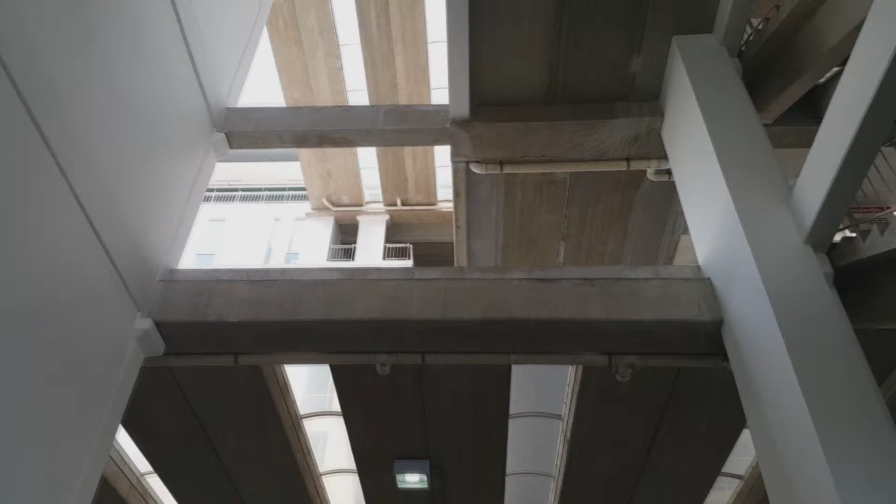For our case study, we chose our Taylor's University as it was assembled using IBS components such as the hollow floor slab. That is, no need to use reinforcement, but only the use of tendon is required. Precast beams and columns and staircases are used. The components have been manufactured off-site and transported to Taylor's University to assemble. The only task that the workers had to do was to assemble the components to make the structure efficiently.

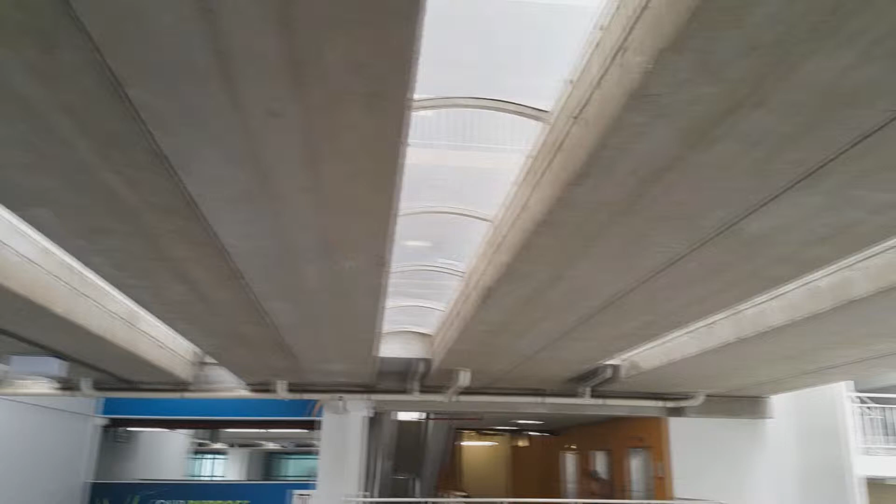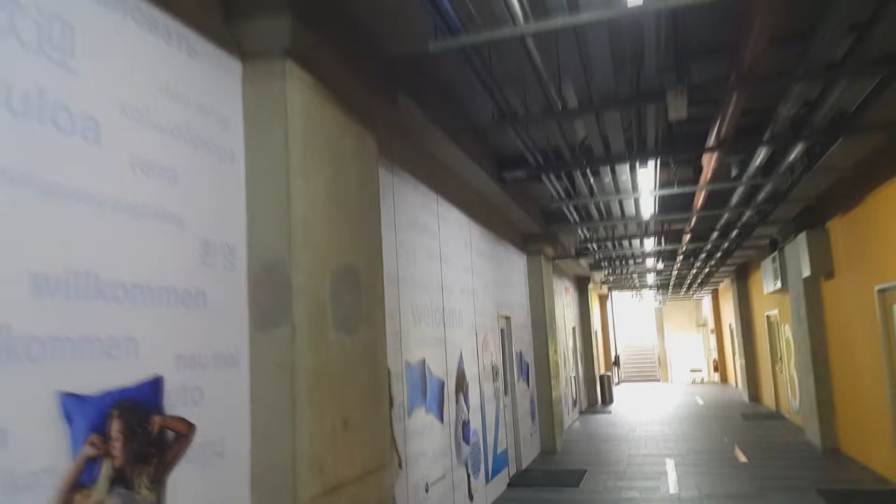This system has reduced construction wastage, it speeds up the construction time, no need for skilled workers, and has improved the construction quality and productivity. This system has lowered the total construction costs in terms of labor, materials, and wastage. The engineers have designed this building to be anti-earthquake, and the life expectancy is up to 100 years by using these precast components.

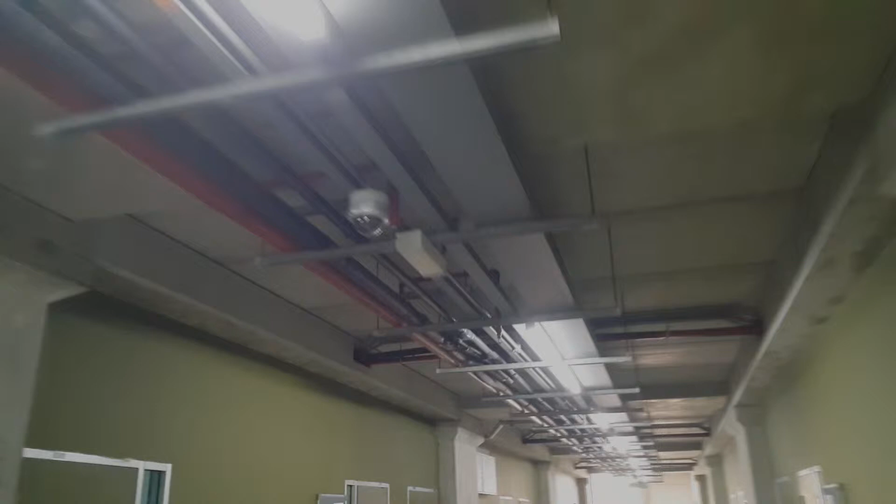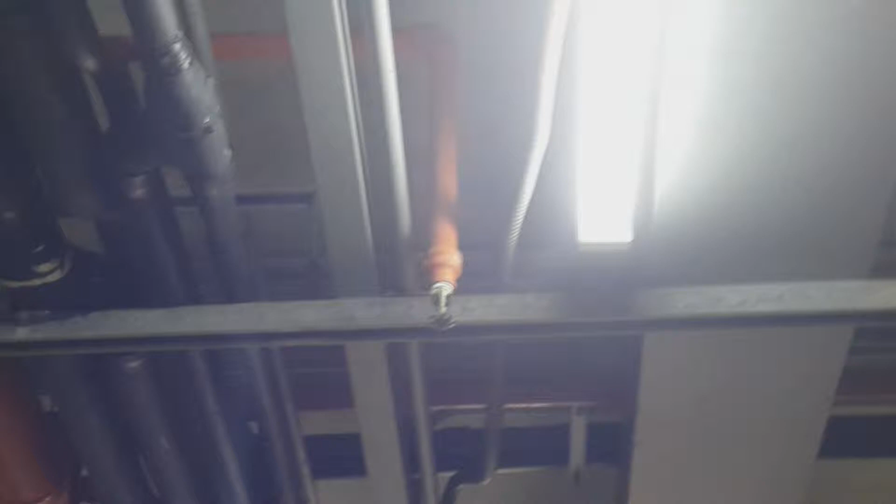Even by using precast components, the services required in this building have been successfully installed in the corridor ceiling, such as electrical wirings, water pipes, air conditioning pipes, and fire protection systems like sprinklers, which are all fixed to the ceiling. Even in the classroom, 3/4 of the space has been used for ceiling purposes to hide the services and add aesthetic value to the room.

The Malaysian government has been encouraging the industrialization of the Malaysian construction industry with different techniques and construction. According to the CIDB IBS survey, less than 1/3 of the completed projects in Malaysia have utilized the IBS method.

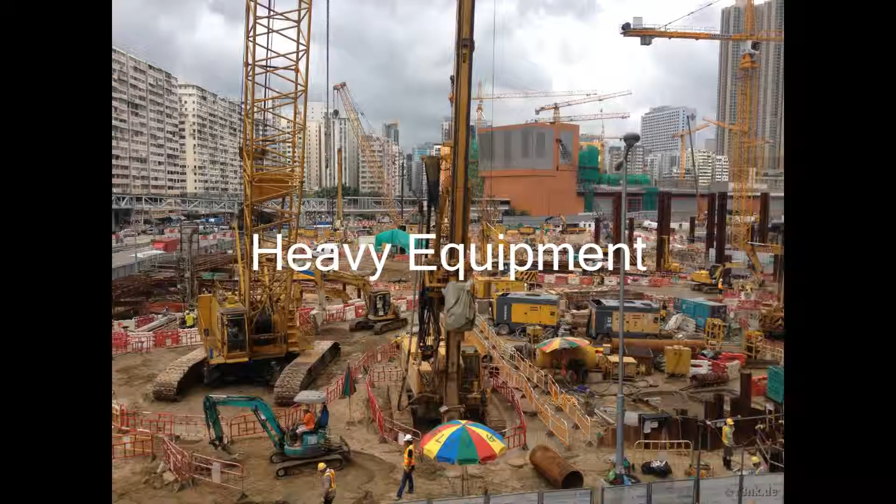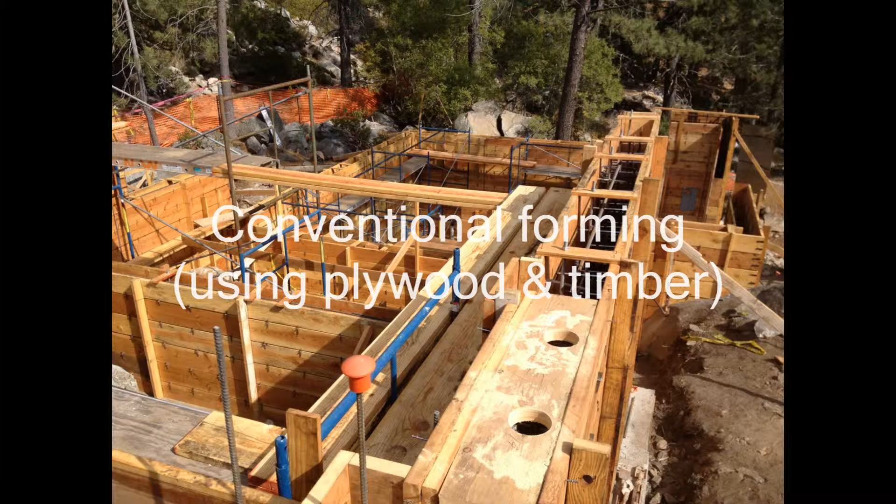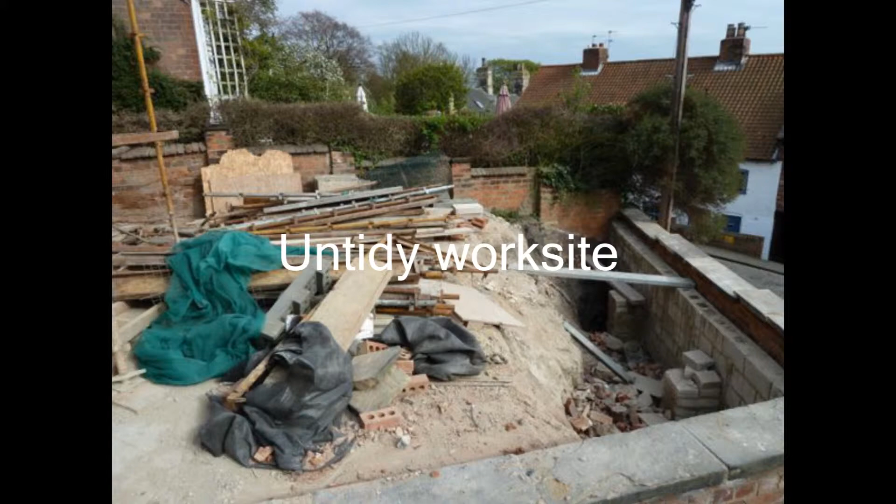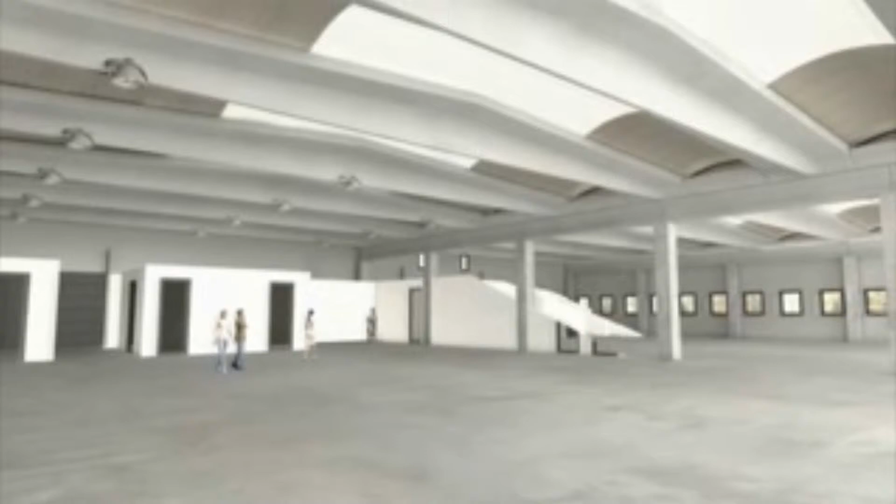This is the process of precast concrete. The process starts with engineering. Every product is engineered using the latest tools, and detailed drawings are created using the 3D computer-aided design process. Once the design drawings are approved, they are sent to the factory floor and used to monitor the production. Now it's time to assemble the rebar cage.

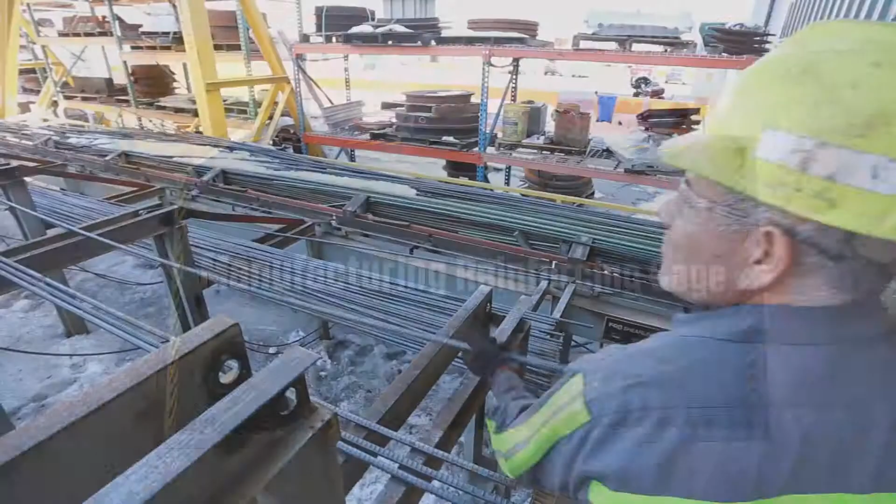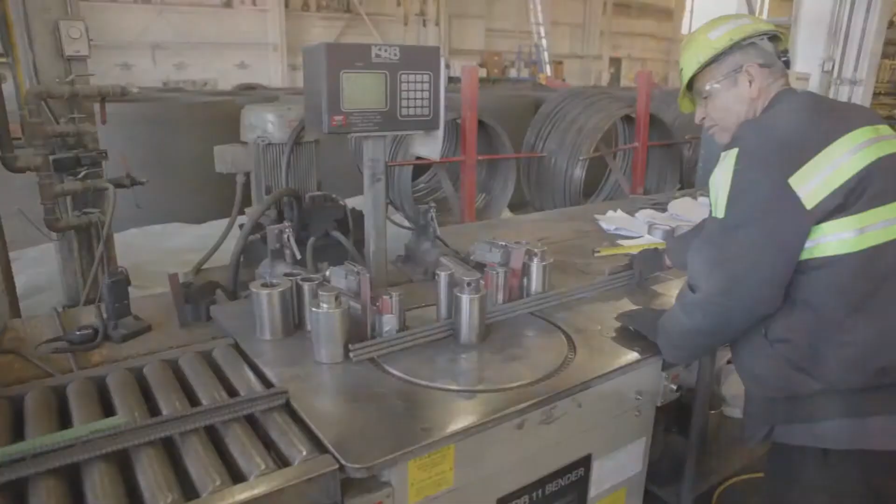The first step of this process is cutting and bending of the steel reinforcement. The correct rebar is selected and taken down off the storage rack. It is then cut and bent to the exact dimensions needed to fit the design requirements. Next, the bars are assembled and tied together to form the reinforcement cage. Rebar wheelchairs are used to help position the cage within the form and ensure proper clearance of the reinforcing.

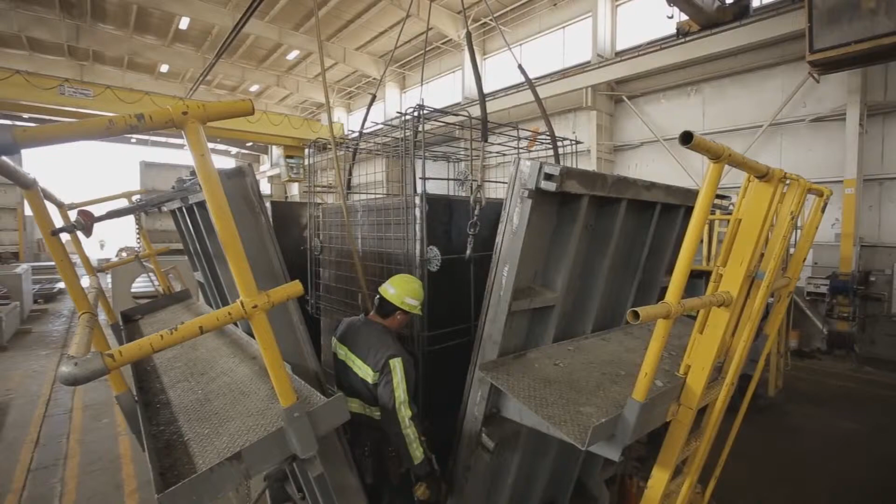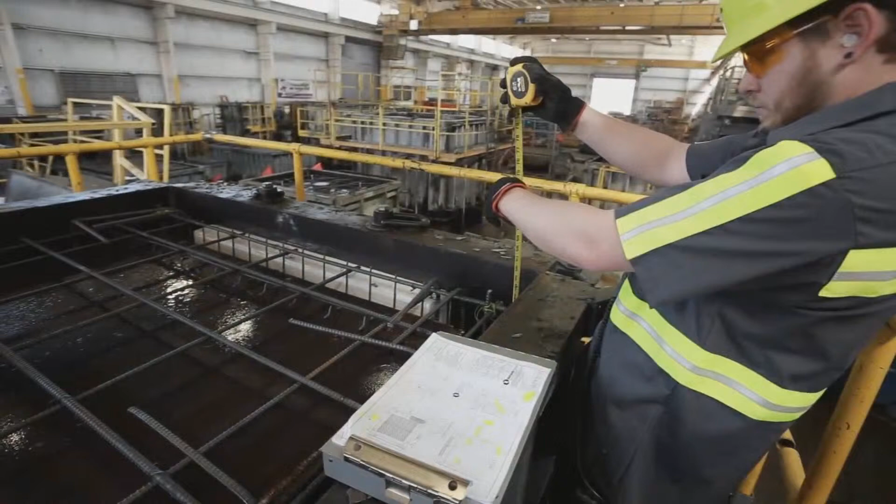Once the cage assembly is complete, preparation and cleaning of the form will begin. A form release is applied to each surface to ensure the final product can be easily lifted from the form. When the form is ready, the overhead crane will pick and place the cage onto the core of the form. Once the setup is complete, a certified quality control technician will conduct a pre-pour inspection. After satisfactory completion of this inspection, the workers will start the concrete placement process.

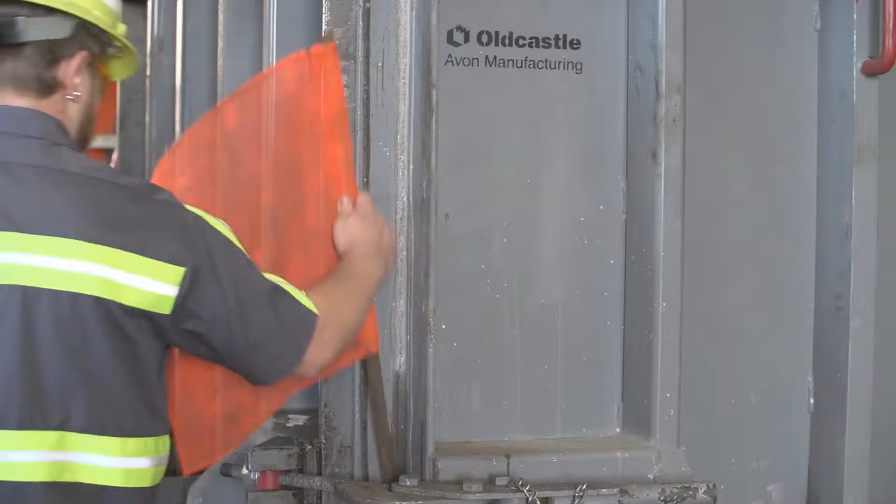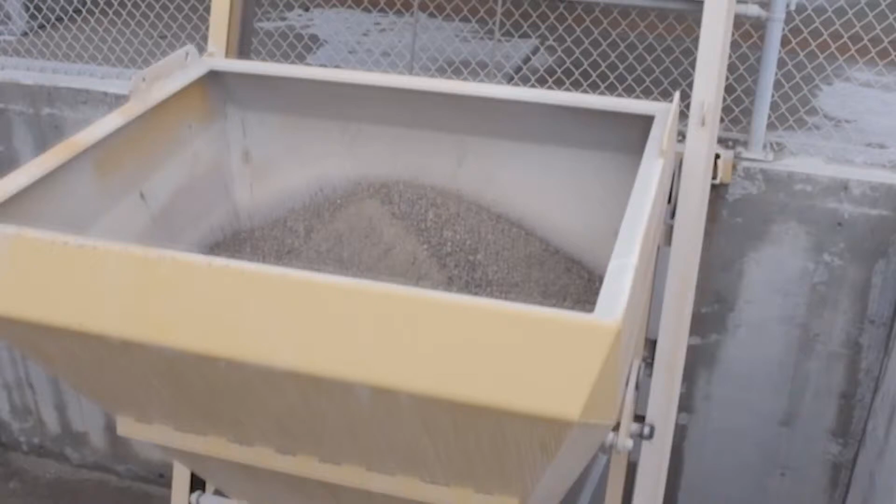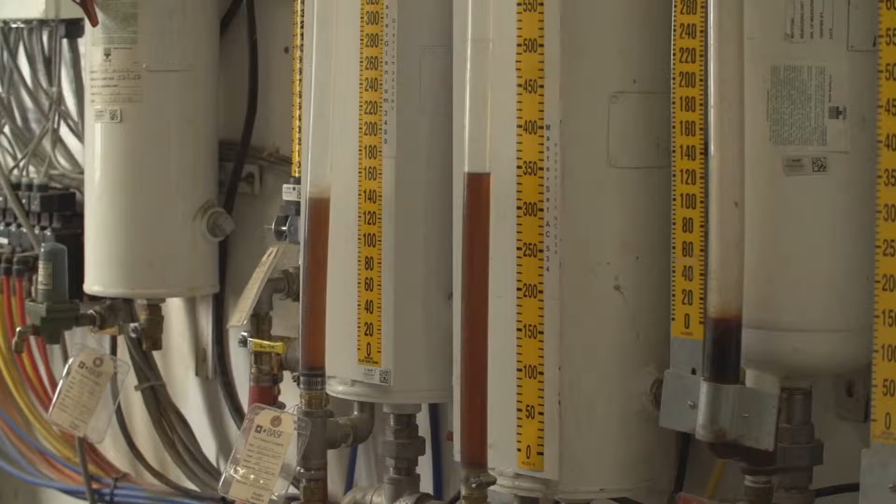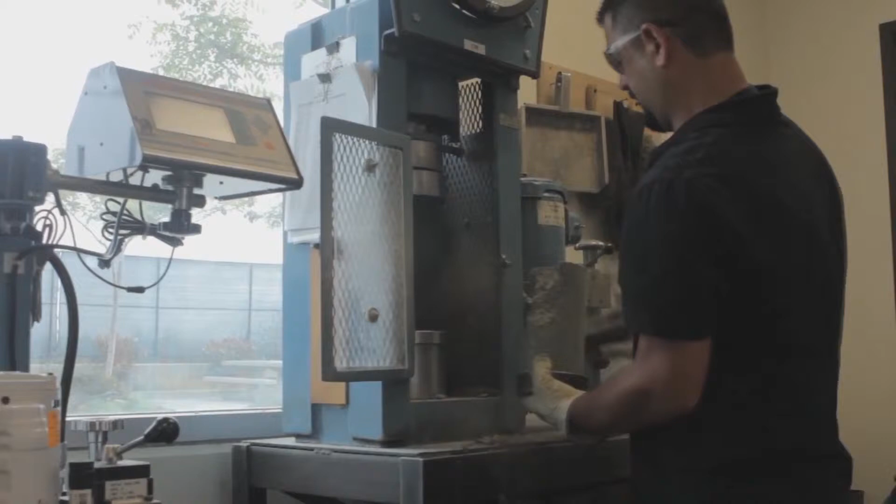The raw materials used for the concrete are cement, coarse aggregate, sand, and chemical admixtures. They are carefully selected and mixed according to the specific requirements. Normally, every precast concrete factory has a concrete laboratory used to conduct routine raw material testing and control exact quantities for each batch. Once the materials are properly mixed, the self-consolidating concrete will undergo a variety of tests to ensure it is of required quality.

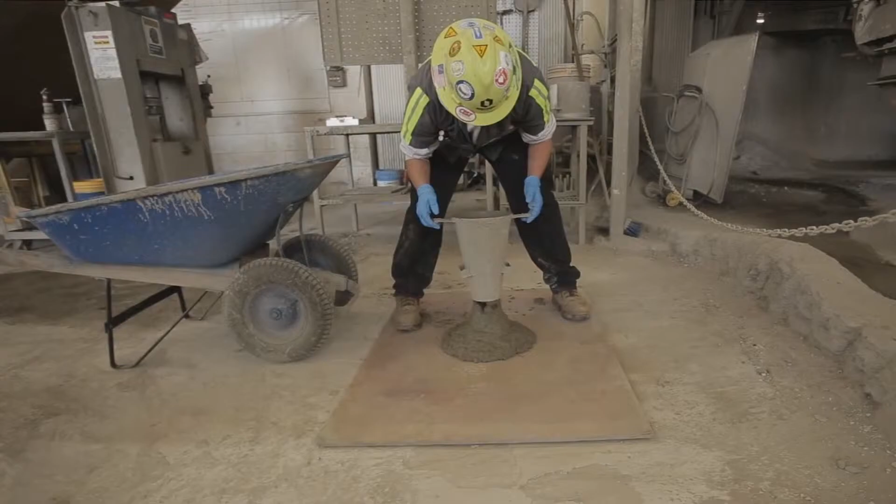The approved batch is transported in a bucket via an overhead crane to the product form. Concrete is placed into the form and care is taken to allow the concrete to flow without entrapping air voids. Once the form is filled, the top of the form is screeded off and the specified finish is applied. Once the concrete is placed, the curing process begins. This may include covering the product overnight in order to capture the heat from the hydration process. The controlled environment of the precast factory enables the products to properly cure and reach the full design strength.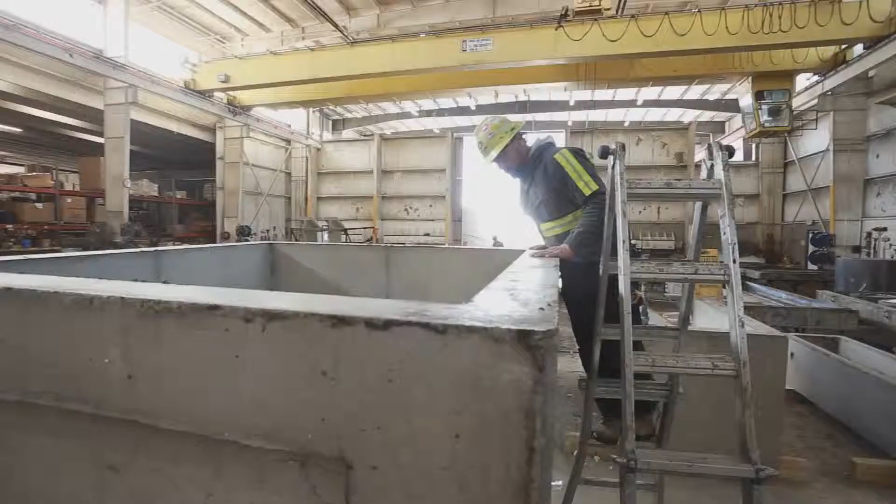Once the technician confirms that the product has reached the desired strength, the product may be removed from the form by lifting devices. Once the product has been removed, it is then cleaned and a post-pour inspection is conducted. If all design dimensions have been maintained and no visual defects are noted, the final product is then labeled, transported and stored in the yard. When the customer is ready to receive the order, the product is loaded on a truck and properly tied down for shipment and delivered to the project site.

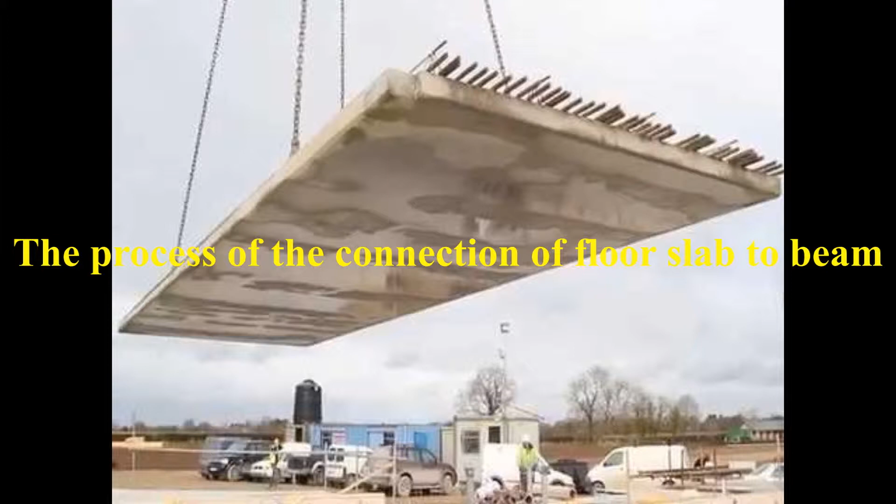Hello guys, now I would like to tell you guys how precast concrete forms a building. The precast components can be connected in a few ways. One of the ways is slab to beam.

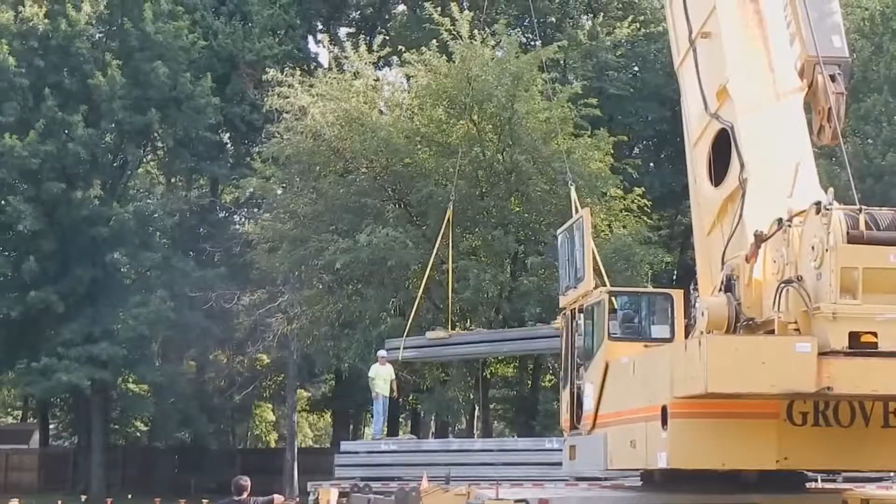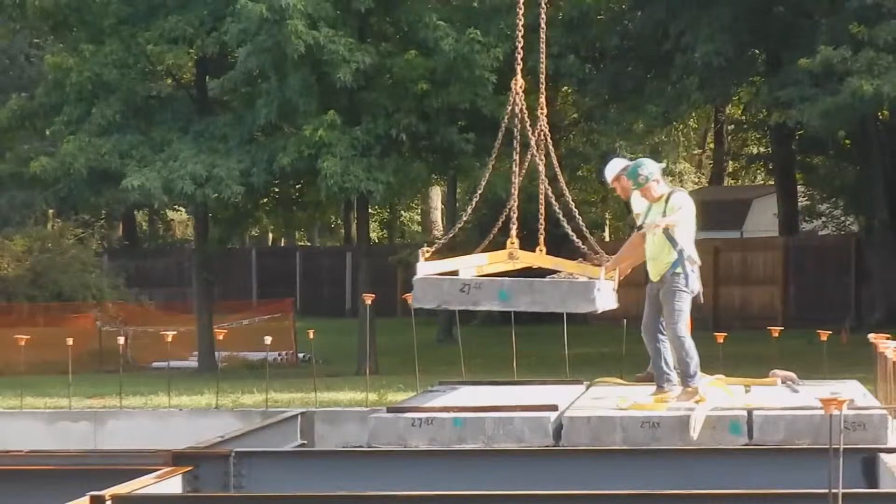When the hollow core slabs are sent to the site, they are lifted up from the delivery truck by a mobile crane with a lifting beam, top lift clamps with sliding shackles and accessories, and a safety chain. After lifting up the hollow core slab, it is placed in the required position, and do remember that the accessories and safety chain should not be taken off until it reaches the final erected position.

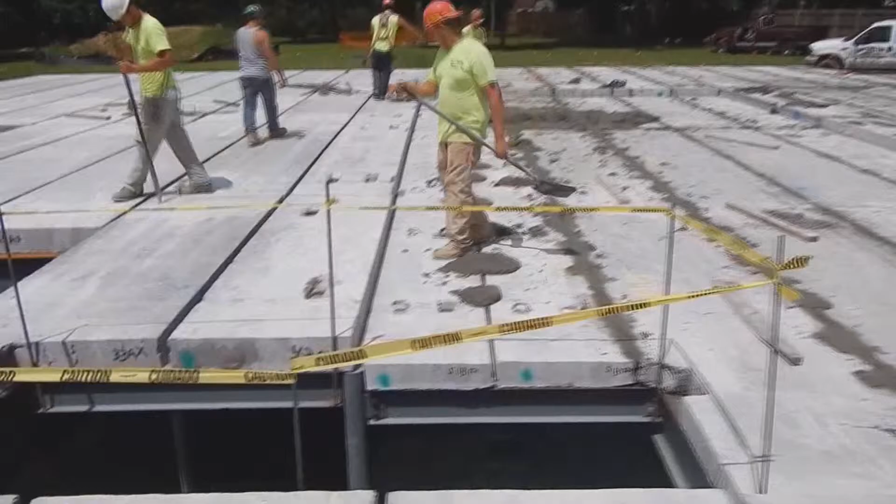The workers on the site place and arrange the hollow core slab carefully in the correct position. When all the slabs have been positioned in the correct place on the beam, they start to grout with a mix named E-mix grout with reinforcement bars.

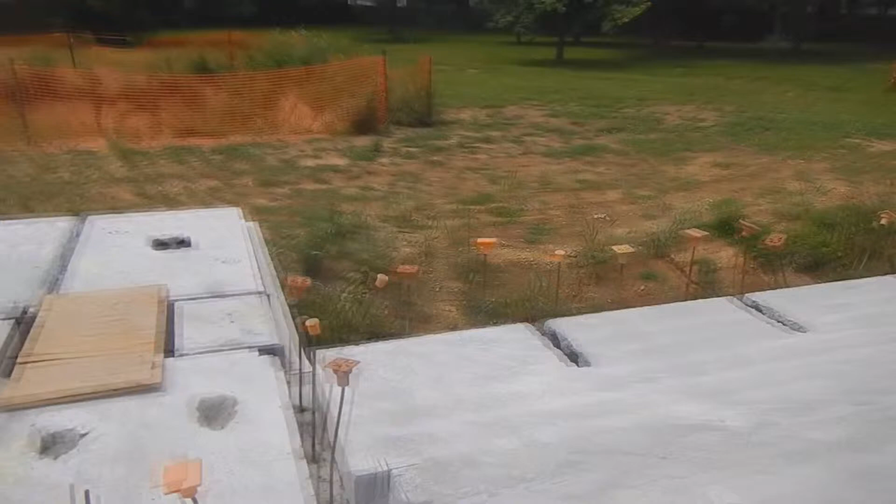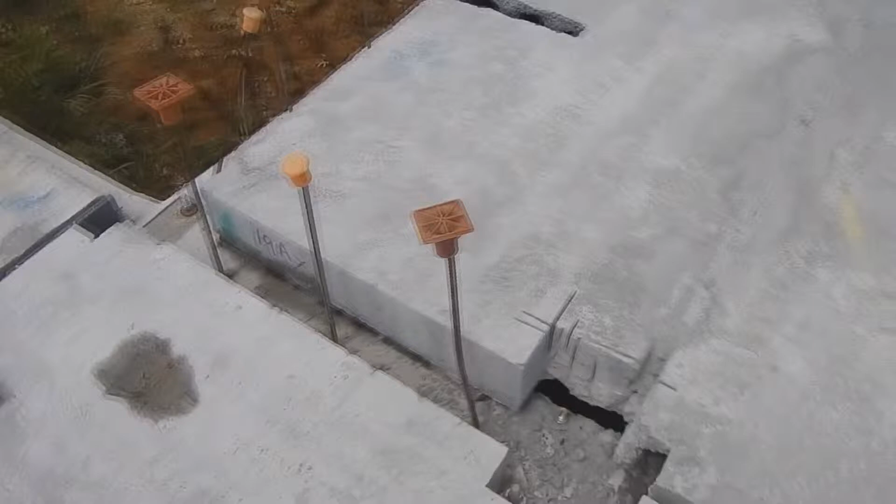When the E-mix grout is dry, the top of the precast slab and supporting beam is topped by 75 mm of structural concrete topping. One layer of BRC mesh is placed on the slab. After the BRC mesh is placed on the slab, they start to pour the concrete on top of the slab with BRC mesh, and one floor's work is done.

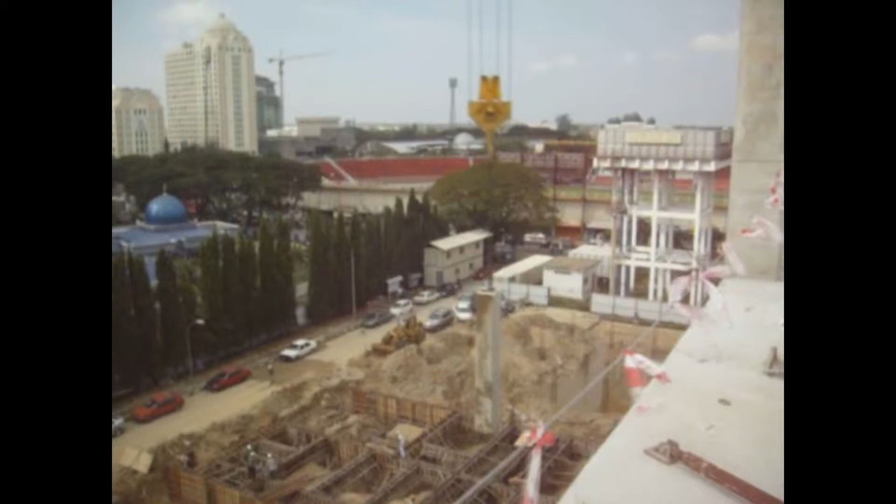Precast columns are installed by hoisting at the lifting hook provided at the top of the column. After the precast columns have been surveyed and aligned, they shall be connected with grouted sleeve connections, which is the method of grouting the bar projecting from the lower column or foundation into corrugated sleeves cast in the precast columns.

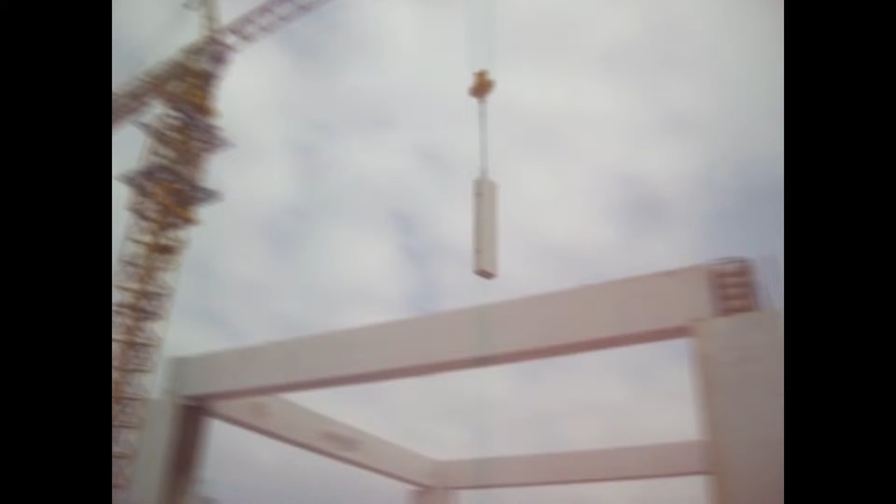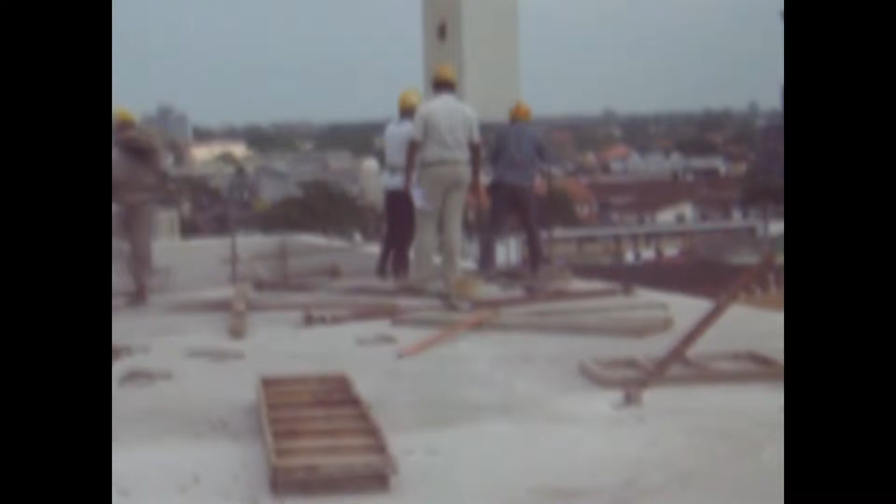Before installation, Aquafix will be applied to the bottom and side of the specific areas of the wall panels. So, these are the wall panels being transported using delivery trucks. A crane is then used to transfer the panels to the desired floor levels.

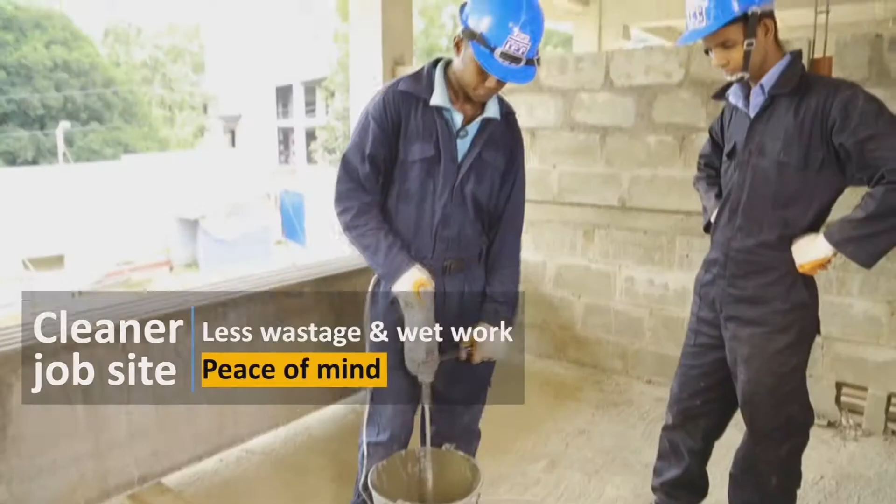Here we can see that steel bars are inserted into the hollow core section of the panels so that it is easier to lift the wall panels onto that machine. During the erection process, 2 to 3 manpower is enough to erect each panel upright and also to align them.

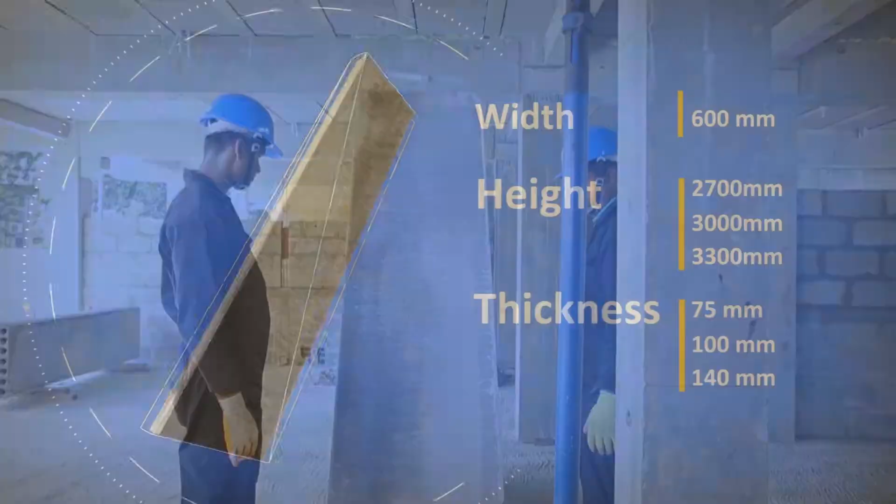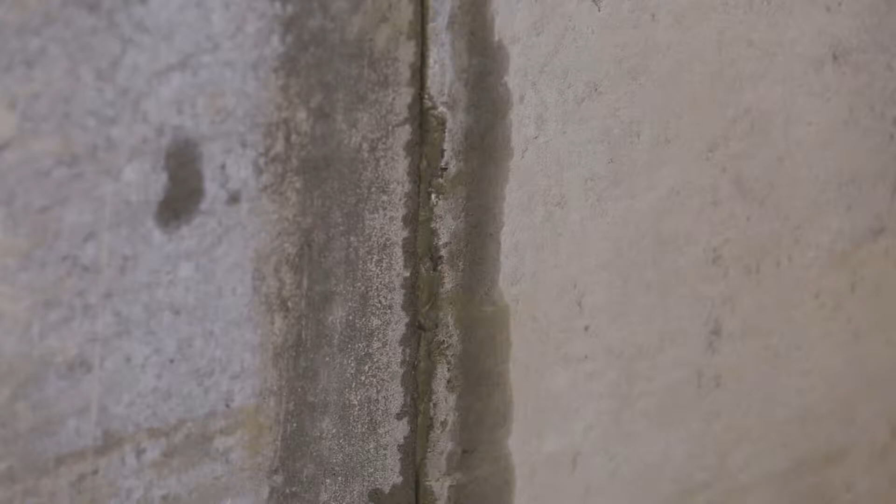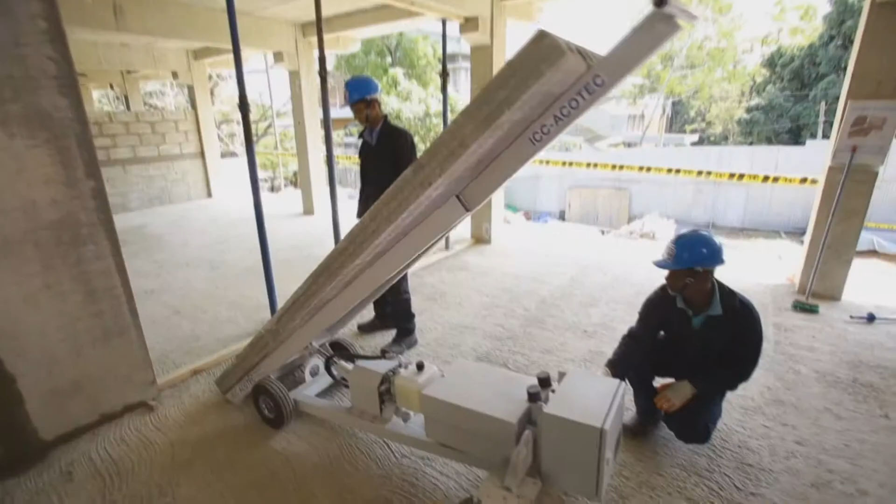The workers then fix a wooden wedge in the space at the top end of the wall. This is to make sure that the wall panels are upright and stay that way until cement mortar is filled in. Aquafix will again be applied to the wall panel gaps to ensure water tightness.

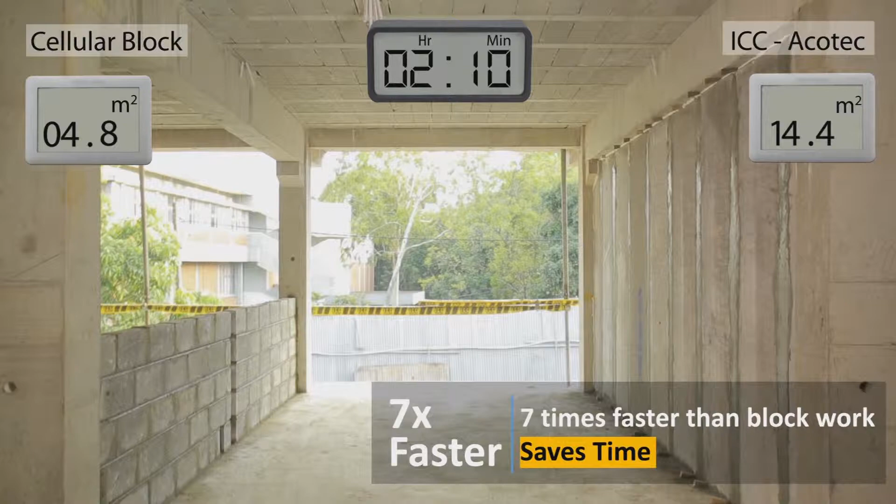Here we can compare the speed of constructing the wall using precast wall panels as compared to using blocks. A hole is then made in the wall for wiring purposes.

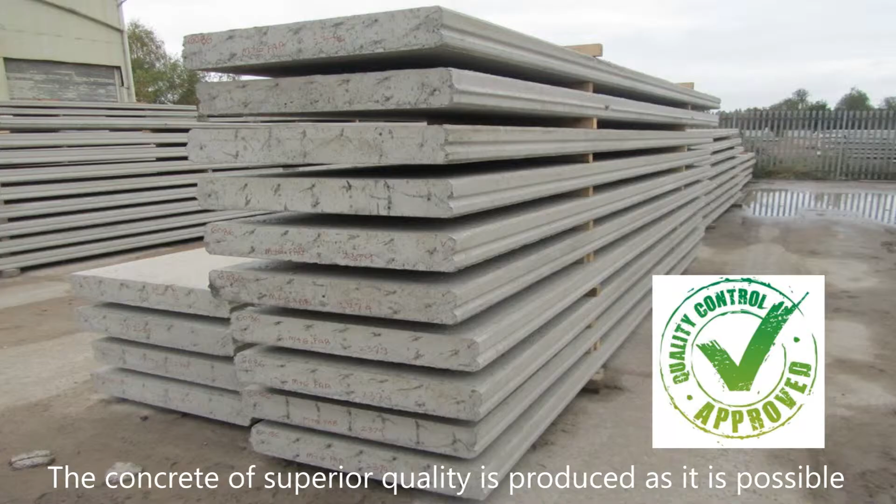Hi sir, I'm going to talk about the advantages and disadvantages of precast concrete. The advantages of precast concrete: concrete of superior quality is produced, as it is possible to have better technical control over the production of concrete in a factory. For example, the environment temperature in the factory can be controlled during the curing of concrete.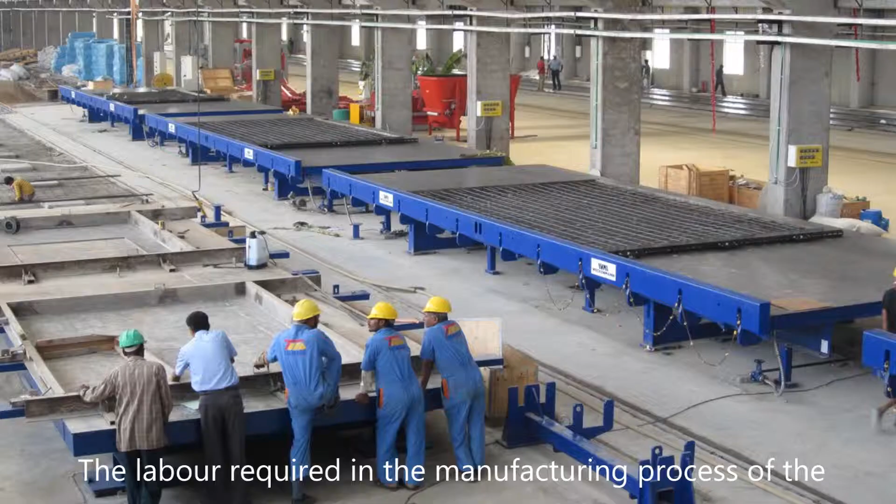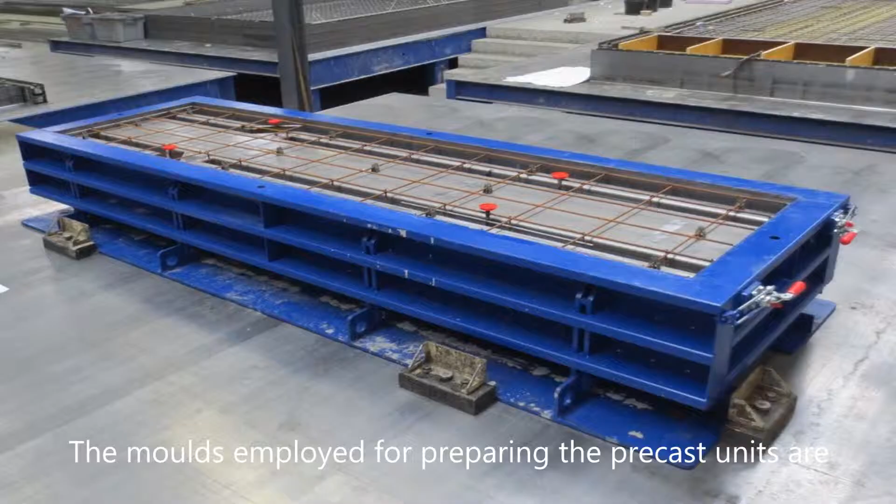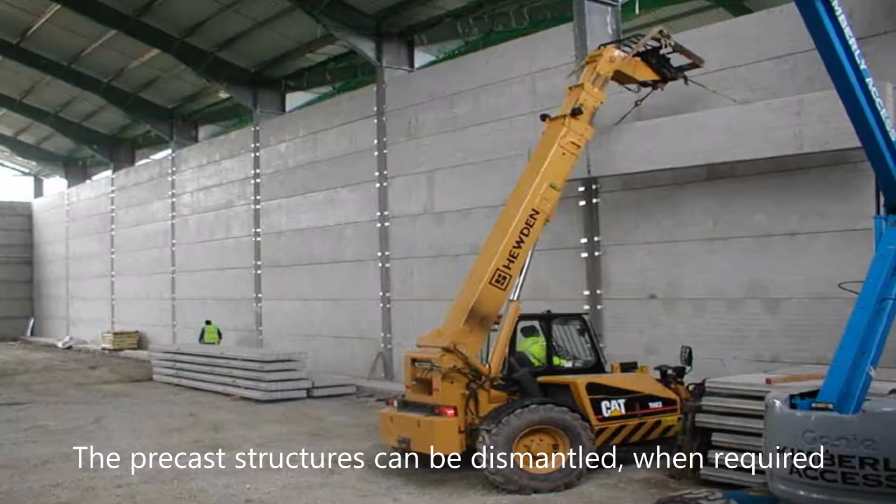The labor required in the manufacturing process of the precast units can easily be trained compared to on-site. The molds employed for preparing the precast units are of steel with exact dimensions in all directions. These molds are more durable and they can be used several times. The precast structure can be dismantled when required and then suitably used elsewhere.

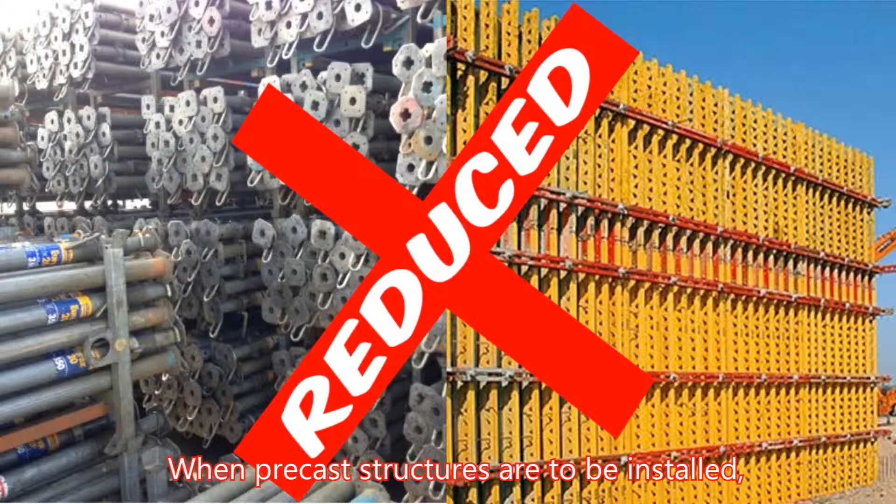A project that uses precast can be completed in a short time. When precast structures are to be installed, it is evident that the amount of scaffolding and formwork is considerably reduced.

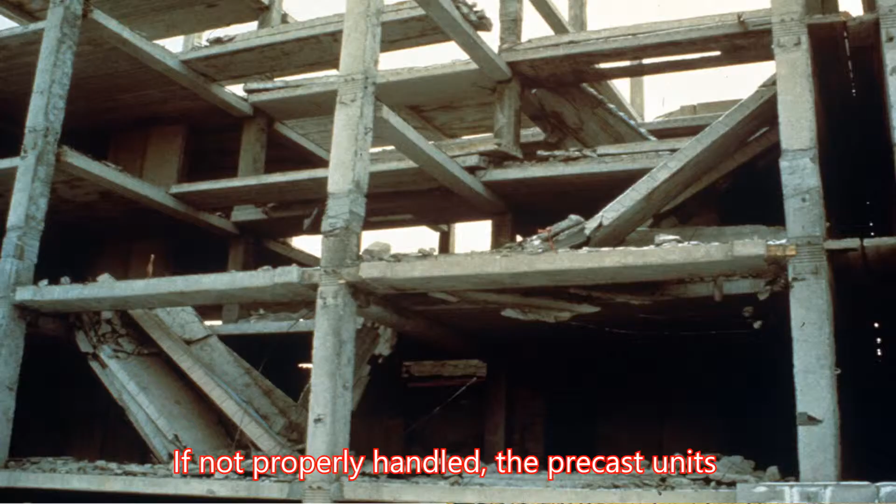The disadvantages of precast concrete: if the precast is not properly handled, the precast units may be damaged during transport, and it is necessary to arrange special equipment for lifting and moving the precast units.

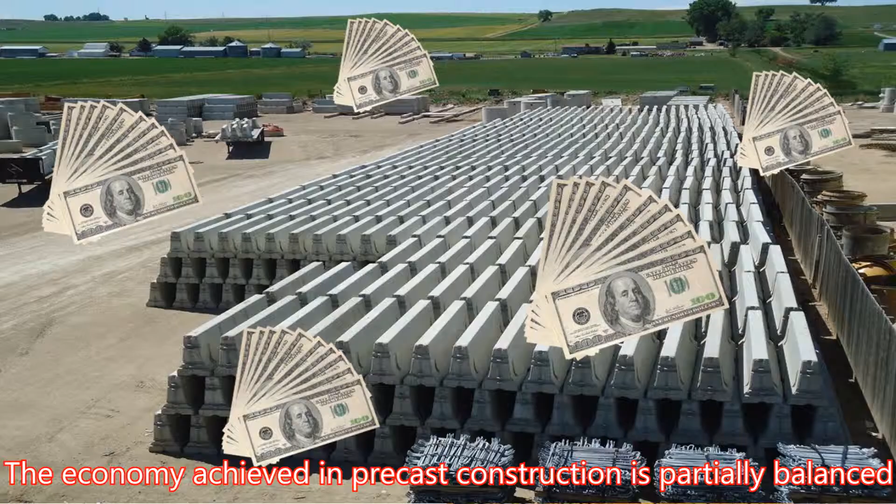The economy achieved in precast construction is partially balanced by the amount to be spent on transport and handling of precast members. It therefore becomes necessary to locate the precast factory at such a place that transport and handling charges are brought down to the minimum possible extent.